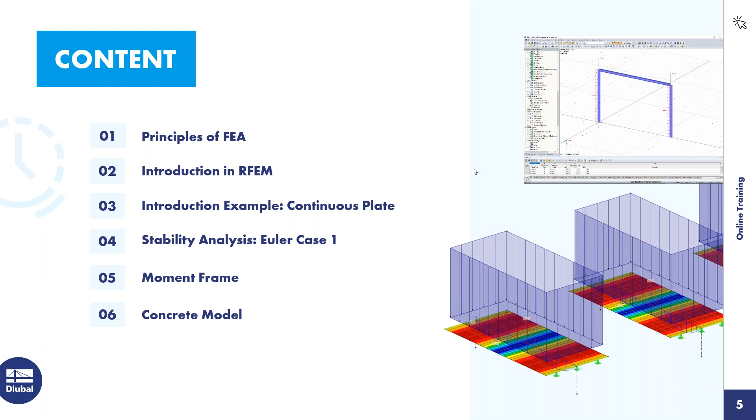So now we can just dive right into the first subject, which is the basics of FEA software.

When using computer software like FEA software, it is mostly and usually based on the displacement method. Another method you may be aware of is the force method, where the unknown is the force and the internal forces need to be calculated or can be calculated. With the displacement method, the unknown is the displacement. So to solve for this, the displacement vectors must be calculated, and then the internal forces and support reactions can be determined.

So the main problem today is an analytical solution can be difficult to determine with large complicated structures. Doing hand calculations for some structures with complicated and odd geometry can almost be impossible or feel like it's impossible. The limits are being reached with large complicated structures, and it's just difficult to get accurate results. And so this is where FEA software comes in.

So structures can now be modeled and converted into a finite interconnected element mesh. Then the material and cross-section properties are determined or given at each FE mesh node, and the mechanical behavior is transferred between these elements. Discretization is a word that I would like you to walk away with, and this is the act of structures being submeshed into finite elements, which is done in FEA software.

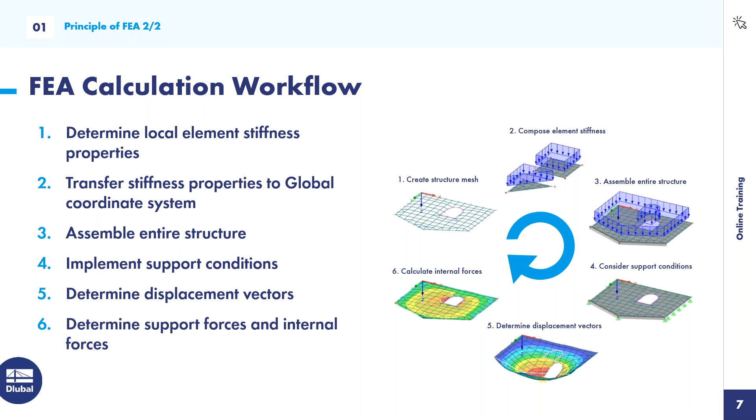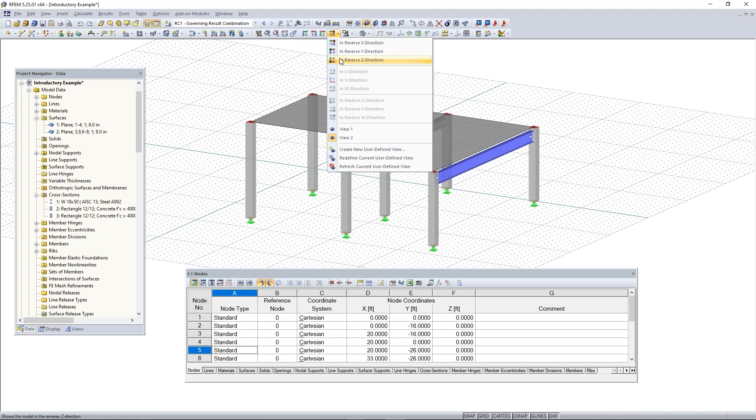We can also change the view of the model. If we go up here, in this category of the toolbar, we have views in the X direction, the Y direction, and the Z direction. We can also change these into the reverse direction. So if we want an elevation view of our model or maybe a top-down view, we can choose these views.

Then in the project navigator, we have at the bottom here in a folder called add-on modules, our add-on modules. RFEM is great for viewing things like internal forces, but if you want to design your structure or elements of your structure, you will need to use add-on modules, and all of the student versions of RFEM come with every single add-on module.

So this is pretty handy and you can play around with these, and they're basically just for design of different materials, and you can see that's how most of them are organized. You can also find the add-on modules up here in the toolbar, and you can see that they're organized again based on design.

Next, we have in the project navigator our display tab down here. The display tab basically allows you to turn aspects on and off within RFEM. For example, we can turn off something like our surfaces, and this just turns off the rendering and display. The surfaces are still there within the analysis, but this just allows you to turn them on and off visually. You can see that this is all organized based on these expandable and collapsible folders. So things like loads and results, we can also turn on and off as well.

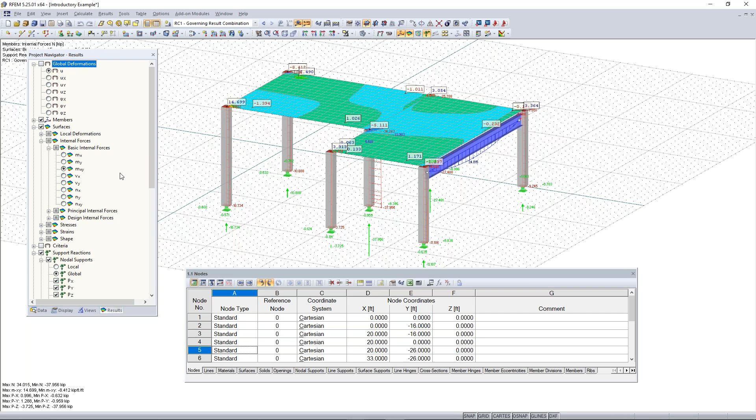Next tab to show, if I turn off my visibilities, is the results tab. This is the last tab in the project navigator. If I turn on my results, you will see that the results tab will pop up here. Again, it's organized similarly to the display and data tab. I'm not going to go into the results in detail right now, but we will later on within our other examples. So I'm going to turn these off.

And then the last thing to go over before we hop into our example is how to navigate through RFEM. We can click in the scroll wheel button if we want to move our model around, and use the scroll wheel to scroll in and out. Then we can hold Control and click in the scroll wheel to rotate the model. If you don't have a scroll wheel, you can go up here to this tool, called Move, Zoom, and Rotate.

You can click on that and then left click to move. You can also hold Shift and zoom in and out with left click, and then you can hold Control and rotate the model. So that's pretty handy. You can also do all of this with the arrow keys on your keyboard, and they perform the same function.

So now we can open our new model to start off modeling our continuous plate example. First, let's go up to the new model button; this is a way to create a new model. You can also do this by going up to File and clicking New. Then we'll go to our model name, and we have to give each model a name. So we'll name this continuous plate example. You can also enter a description for your model. This isn't needed, but it is an option here.

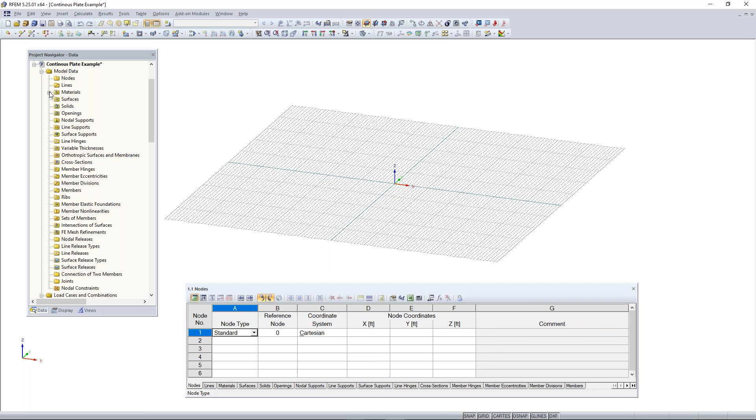So the first thing you'll notice when I open my new model is my work window is blank, and my grid is here in the work window lying in the XY plane. My tables are all blank; some materials have come over from previous models, but we'll delete those. And the first thing we might want to do before we start with our model is take a look at our grid and make sure it's set correctly. So we have our grid points here. They're all spaced by 1 foot, and we have about 50 points in each direction.

And if we want to change the settings of our grid or work plane, we can go up here to this button and click on it. And you can see here we have our work plane settings. So everything up here we don't need to really worry about. This is if you want to change the plane that your work plane sits in. So we'll just keep it as the XY plane and model in the XY plane. Over on the right hand side here, you can see, like I said, we have 50 grid points in each direction, positive and negative. We'll leave this as default, and also the spacing for each grid point we are going to leave as 1 foot. So everything here is okay for this example, so we'll click OK.

And now we can begin with modeling our concrete plate. So to model a 2D surface in RFEM, it's pretty simple. All we need to do is either go to the Insert menu up here and then Model Data, and then we can go to Surfaces, and you can see we have a lot of different surfaces to choose from. We're just going to choose Plane, and then Graphically, and then we can choose a rectangular surface, since our plate today is going to be a rectangular surface. Or instead of going to this menu, we can simply go to our toolbar up here and locate the new rectangular surface toolbar button, which looks like this right here, and we can click on it.

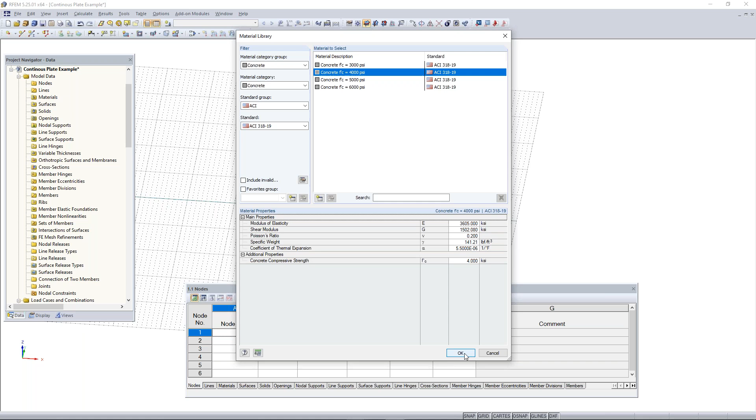So now we have our material chosen, and so now all we need to do is tell the program how thick we want this material to be. By default, for imperial units, 8 inches is selected. We want to increase this to 12 inches for these plates. And so then we can click OK, and now we can draw our plate.

So you'll see my cursor has turned into this reticle-looking cursor, and I also have the coordinates right next to it telling me where I'm located along my XY grid plane here. So I'm going to choose the origin, and then I'm going to draw a 32 by 16 foot plate. So all I need to do is move over horizontally 32 feet, and then I can move up 16 feet in the vertical direction. And then all I need to do is left click. So left click at the origin, and then left click a second time to mark that second point.

Then I can right click, and once I right click, that will cancel out of the tool. You can also hit escape if you like as well to cancel out of a tool. And now you see we have our plate here, or our rectangular concrete surface.

Now the rendering in RFEM you can see is just simply a 2D element with boundary lines defined, but in the calculation the stiffness will be taken as 12 inches thick, so no need to worry about the rendering. This plate or this boundary line is located always at the center of the surface, so there will technically be 6 inches on one side and 6 inches on the other side.

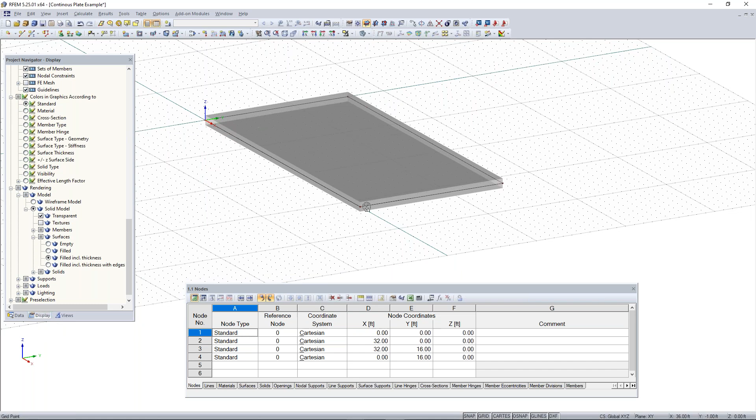And if I go to my display settings and scroll down, we can change the rendering real quick just to show you what I am talking about. So if I go to here under rendering and I change this to filled, the definition of the surface is always at the center of the surface. So if this is 12 inches thick, there's 6 inches of thickness on one side and 6 inches of thickness on the other side. So I'll just turn this back to default, and then we can move on with modeling the other plates.

So I can model the other plates by just going back to that tool and clicking OK. And then I'm just going to model the second plate right above the first one, and it's going to be 5 feet away from the first plate. So I'm just going to draw this one, and again it's going to be the same dimensions, 32 feet by 16 feet. And then I can right click to exit out of that.

And then let's say I already have this surface here and I need to just duplicate it. I can simply just select this second plate here by highlighting it from right to left or from left to right. And then I can use the tool up here called Move and/or Copy.

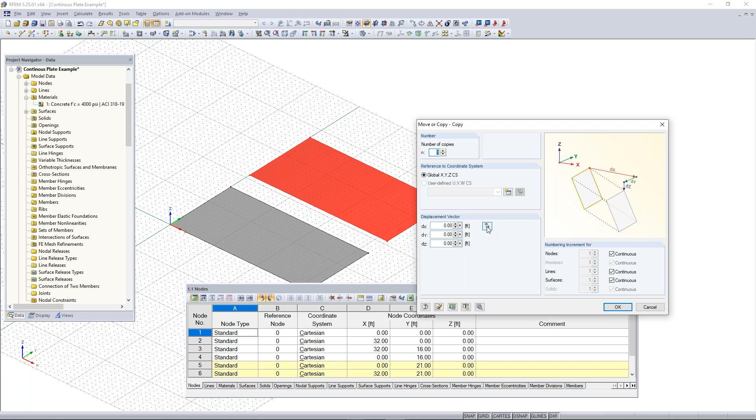And what this tool allows me to do is make one copy of the element that I selected, and then I just need to tell it which way I need to displace it within the plane here. So I can either enter those displacement vectors, or I can use this graphics tool here. So I can click on this button, and then I can simply just move this plate.

I'll choose my bottom point here, and then I want this bottom point to move again 5 feet above where this plate's located. So that'll be this next point. I'll hit OK. And now I've made one copy of this plate and moved it that much more in the Y direction. So now we have all three of our plates here,

and since my grid is only 50 grid points or 50 feet by 50 feet, I'm just going to highlight all of my plates here, and then I'm going to left click, and then I can move my plates down into more of the center of my grid here.

Next thing we want to do is model our beam. So what I'm going to do is create a new cross-section or create a new member. And to create a new member, we can either go through the insert menu or we can choose the button here, new single member. So I'm going to click on new single member. And then under new single member, I'm going to go to the cross-section library.

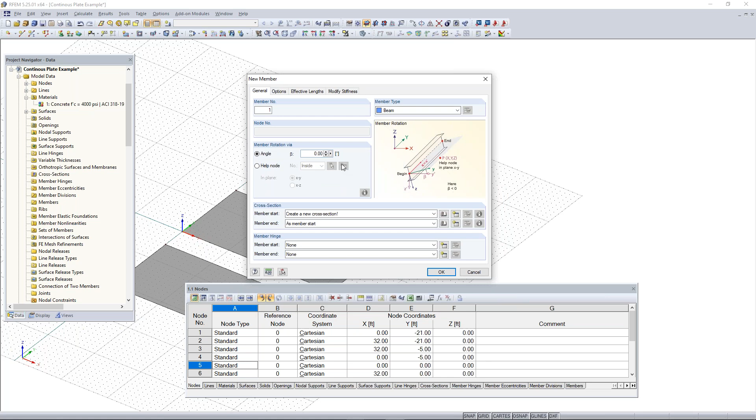This is the new single member dialog box, kind of similar to the surfaces dialog box where we can choose our member type. For beams and columns, we want the member type beam. And then for our cross-section, we can choose the cross-section start. So we can either create a new cross-section or go to the cross-section library to choose from a predetermined cross-section shape. So I'm going to click on the cross-section library.

And once that pops up, you can see our cross-section library is organized by rolled and built up sections based on a standard. Then we have our parametric thin walled sections where they're parametric, so you can choose the dimensions manually for each of these. We have parametric massive, which are usually used for concrete, and then parametric timber, which you can again use for timber and choose the dimensions for.

Since we're using concrete for these plates here, and they're rectangular in shape, we're going to use the rectangular cross section. And then you'll see the rectangular cross section parametric window will pop up, and then we can change our parameters. So we can make the base 40 inches, and then the height we can make 12 inches.

And then now that we have our dimensions in, we can choose our material, just like the surface. So since we already defined this concrete 4000 PSI material, we can just simply use that instead of having to go into our material library again. So we can click OK, and then we can click OK out of that box.

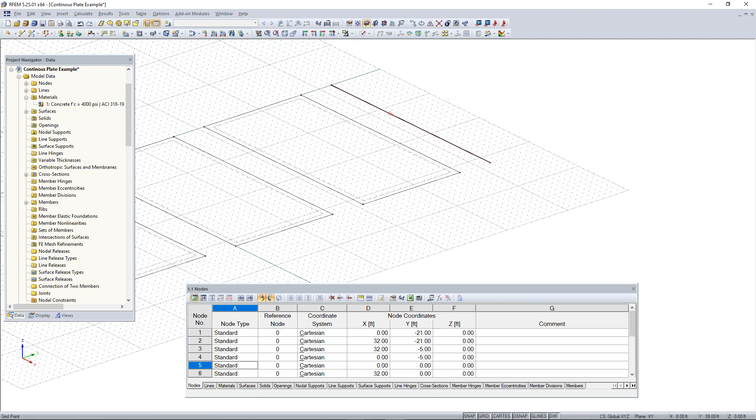Then you can also see that our surfaces are also just made out of these 4 boundary lines, and this dotted line is showing you that there is a surface that is made up here. So again, we can use this button up here to change the rendering of our model, and then we can move on with dividing up our lines here and adding some supports to our model.

So what we can do is divide the lines here. And to divide lines in RFEM, there's 3 different options. So what I can do is right click on this line, and then I can go up to divide line, and you can see the 3 different options for dividing a line.

I can either do it graphically. So if I choose graphically, I can simply just go to the line, and then I can see from the start to the end, the length at each point, and my cursor will snap to it. So I'm going to add this node and divide the line halfway down it at 16 feet.

And then you can see I can do the same thing for this line up here. That's just a simple way of dividing lines graphically.

The next way we can do this is by right-clicking on this line, and we can divide our line by intermediate nodes. When I choose this option, these arrows will pop up on each of our lines here, telling us the orientation that we drew the line. So this kind of helps us if we need to know that.

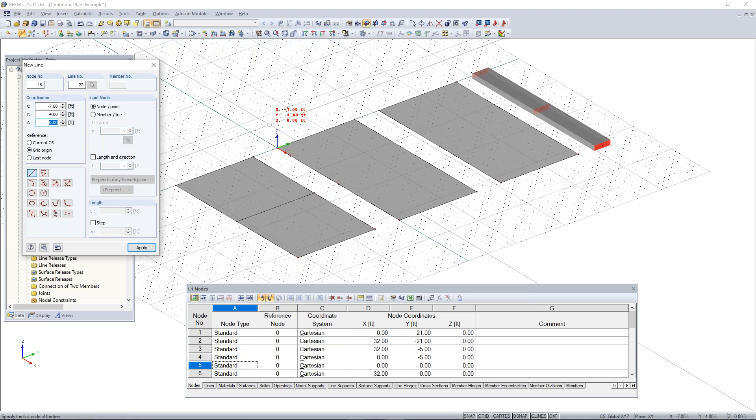And then I can draw my line, and you can see my cursor snaps to these nodes here. I'm going to snap to this node and then to this last node. And then I can exit out of that tool, and instead of drawing the rest of these, I can use this pretty powerful function we have.

Where I can click and select a line here. And whenever you click and select something, you can hold Control and then right click and drag, and that allows you to make a copy and drag that element to wherever you want. So I'll left click, hold Control, and then I can drag this line again to the last plate there.

And now we can add in our line supports. So within RFEM, there's two different supports. We have nodal supports for just single points, or line supports to support the whole entire length of a line.

So I'm going to go up here to the button New Line Support, and then I'm going to add in hinge supports. I can choose from two different presets we have for line supports. The hinge support is fully fixed in translation, but fully released in all of rotation. The rigid support is fully fixed in all 6 degrees of freedom. You can see how that is checked, how all the degrees of freedom are checked off, showing you how the condition is defined. So I'm going to use the hinge supports and click OK.

And then I can choose and click on each of my lines here, and I can simply do that for the rest of my lines to add in my supports to these plates.

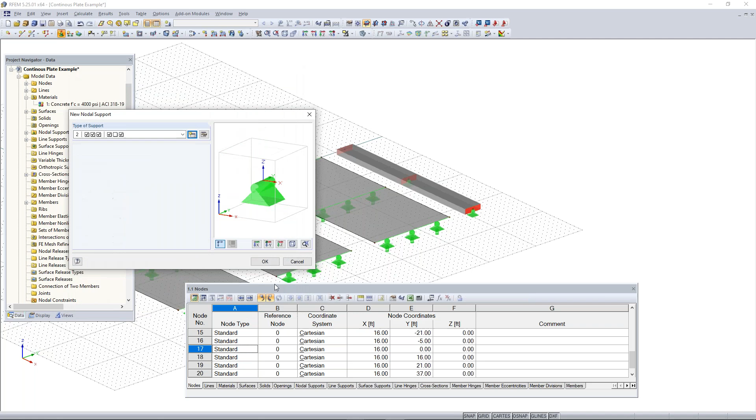The reason for this is because if all 3 supports on this beam were simply hinge supports, then this beam would be able to rotate infinitely about its x-axis, causing an instability within the program. So we need one of these supports to lock the rotation about the local x-axis.

If I right click on this beam, I can show the local x-axis system by right clicking and going to the shortcut menu, then to the local axis system. Now you can see the x-axis as well. I'll right click and turn that off.

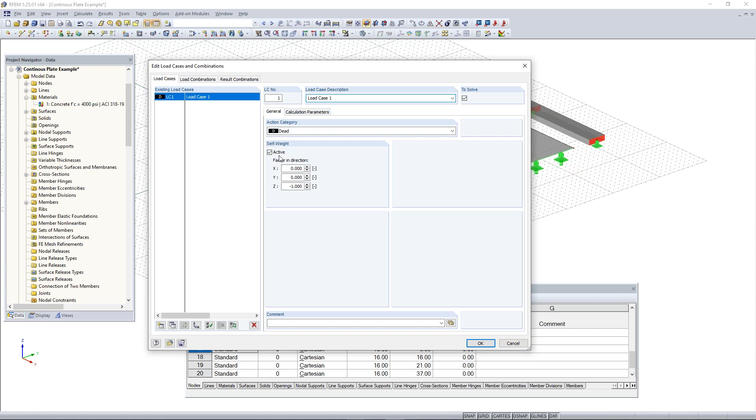We need to enter in a description, so we'll name this load case 1, since we're not designing according to any standard and the action category isn't too important right now. You can see self weight is automatically turned on for dead load. For this example we don't want self weight activated, so I'll uncheck that option. You can see the -1 in the z direction for the factor and direction is applied, which basically multiplies this factor by the self weight of the model in the downward direction to simulate gravity. We'll turn this off for now and click OK.

Now what we want to do is create surface loads for our plates here, so I'm going to go up to new surface load.

This button here, new surface load—to go over this, you can see we have a bunch of different loading options within the toolbar: nodal loads, member and line loads, surface loads, and solid loads. Mostly we're just worried about member loads and surface loads. You can also find this loading information up here in the insert menu if you have trouble finding the correct loading type on the toolbar. So again, we'll click on the button, new surface load.

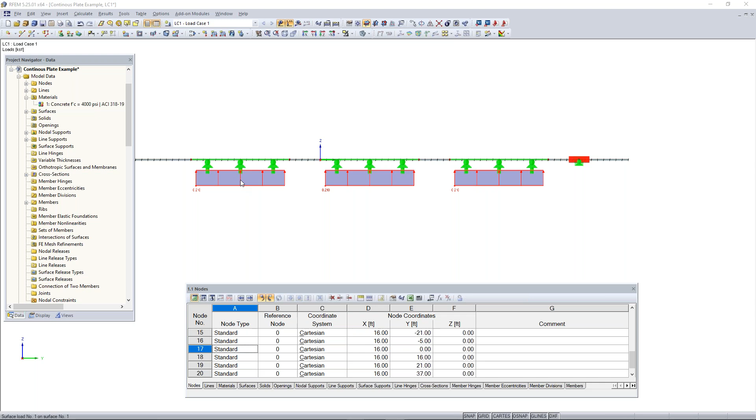I can drag from right to left to select my loads, select all of them, double click them. Then all I need to do to change the direction or flip the direction is add in a negative sign. I can click OK, and then rotate my model back. You can see my loading has been added.

I can also turn off this grid in the background now that we're done with modeling, to get a cleaner look. So I can go down here, and these options down here are buttons used to turn off certain functions like snap, grid.

You can also change your grid to a polar grid. We'll keep it as Cartesian. You can turn off some other things like guidelines as well. So we'll just turn off the grid, and now you can see we have just a cleaner look, better for presenting.

The next thing we need to do is add our loading to our member. For our member loads, we want to use member loads, always keep that in mind. Then for lines, you want to use line loads. That's how you know the difference between these two.

Since we're applying a load to the member, we want to use member load. This member loading is going to be the same as the uniform load or the surface load that's applied here, just converted into a linear load. So we'll keep the load type as force, and it's going to be uniform.

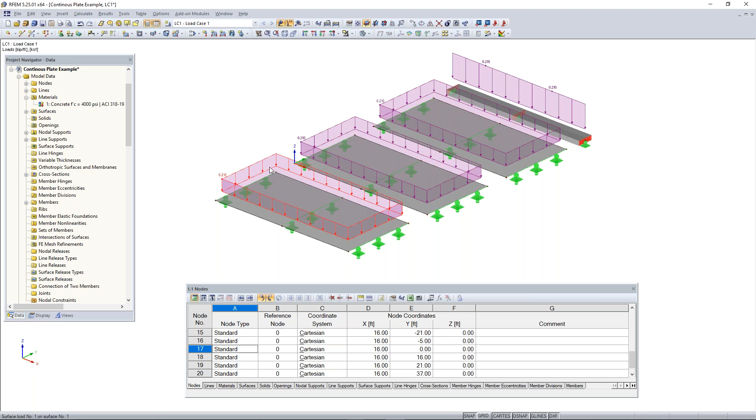Then we can now add in or edit our FE mesh. FE mesh for members is not too important, but FE mesh for surface elements within RFEM is pretty important. This is what you need to look out for, and what we can do is go up here to calculate.

We can just see what the global FE mesh looks like when we hit generate FE mesh. You don't have to do this before any calculation, but for example purposes, I just wanted to show you what the FE mesh looks like. It's easier to view if I turn this into a wireframe view since it's gray on gray. You can see this is what each FE mesh element looks like on our surfaces here.

If I go to calculate and I go to FE mesh settings, by default, the FE mesh in imperial units, the target finite element length for each of these mesh elements is 1 foot. This actually looks pretty good on our surfaces here, but for example purposes, if we need to refine our FE mesh for certain elements, you can do this.

So what I'm going to do is add in an FE mesh refinement to each of these surfaces with different lengths. I'm going to turn off the global FE mesh for now, then right click on the first surface here, turn this back into a solid transparent view, right click on the first surface and go to FE mesh refinement, go to new.

And once I do this, it's asking me to create a new FE mesh refinement definition. So I'm going to go to the button, create new FE mesh refinement. I'm going to go to surface, and then I'm just going to make the target FE length of this refinement to be 0.2 feet. So global FE mesh in RFEM was 1 foot. If I need to make a refinement and shrink the FE mesh for better accuracy on a smaller surface, I could do that and shrink the FE mesh length to 0.2 feet.

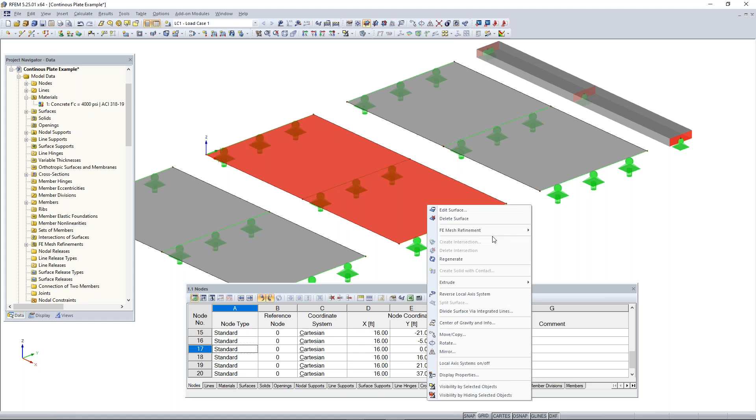And we're just going to do that for this first surface. And then we're going to do the same thing for these other two and increase the FE mesh length to see what that looks like. So we'll right click on the second surface, go to new FE mesh refinement, create a new FE mesh refinement. And instead of 0.2 feet, we're going to make this one 0.4. And then the last one, we'll do the same process.

And you can see those other refinements that I created, we could choose as a preset if we didn't want to have to create a new one. But for this one, for this surface, we want to increase the length to something like 0.6. And we'll click OK, click OK again. And then if I go up here to the calculate menu and I go to generate FE mesh, and then I turn this into a wireframe view

and display the FE mesh, you can see that this little symbol is on our surface telling us that we have an FE mesh refinement on the surface, and you can see that those symbols are the same shape, telling you easily what the FE mesh length of the refinement is. And you can see the difference in FE mesh length between these from 0.2 feet to 0.4 feet to 0.6 feet. And that's kind of giving an example of how FE mesh lengths can change over these different plates here.

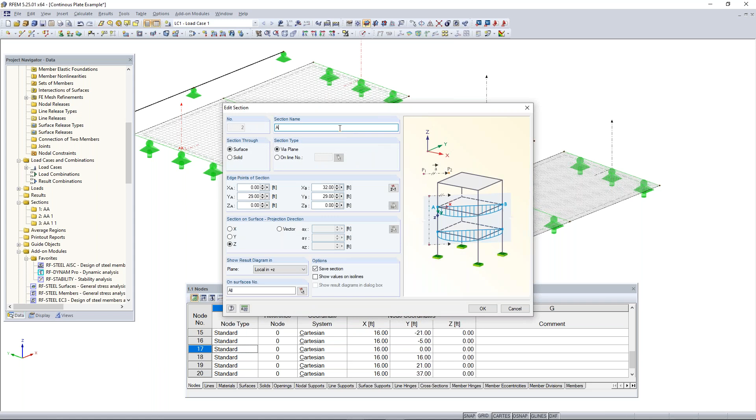So I can go into my project navigator, and then I can go to my sections folder here and expand that. And you can see the names here. So I can double click on one of them, and I can change this name from AA to AB. And then I can change this third one from this to AC and click OK.

And then I now have my section cuts, and I'm going to turn this back into a solid transparent view. And now basically everything is ready for calculation. So I'll run the calculation, and then I think this is a good point to take a 5-minute break.

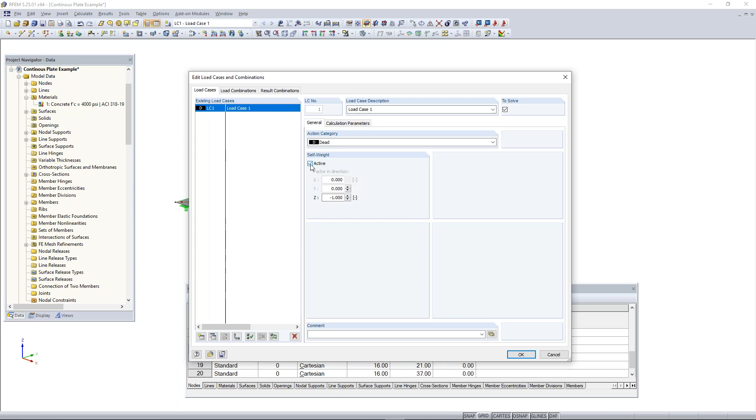So if I click OK, the self-weight is now activated. And if you wanted to see a graphical representation of the self-weight, you can go to the Display tab in the Navigator, then go to the Loads section, turn on my loads, and also turn on my self-weight loading. That's normally hidden, but if you wanted to view what the self-weight loading looks like, you can see that there as well.

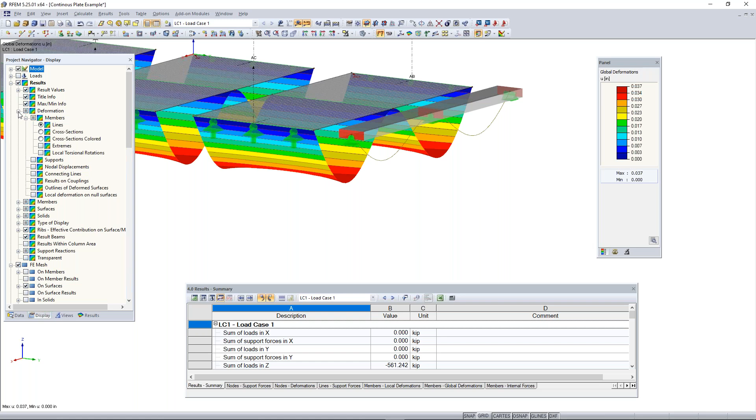But if I want to have this color coded as well, or colored cross section, I can go to display, and then I can go into the results here, and then under results, we want to expand deformations and then expand members, and I can turn on colored cross sections.

So then you can see the rendered colored cross section deflection shape of our member is shown as well, just giving a better visual of what that looks like, and you can see it's basically almost the same as the deflection for our plates, and we're going to go over comparing these results in just a little bit.

Then the next thing we can view if we turn off our deformations is the results on our single member here. So if I check on members and then under internal forces, I can check off the option to view our axial forces. We can also view our shear forces. So VZ is for shear in the local Z axis.

So again, if I right click and turn on the local axis system here, you can see the local axis here, so we have our Z direction. So this is the shear in the local Z direction. If I turn this into wireframe view, we can get a nice look at what that shear diagram looks like as well. So that's good.

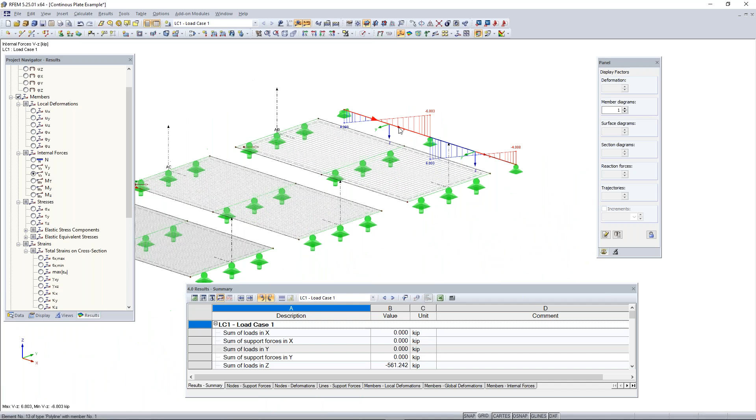Next thing we can also view is our moments about the local y-axis. So we can take a look at what that moment diagram looks like as well. Looks like we get a max moment here of negative 21 kip feet. So next we can also view the surface results. So for example, we can take a look at our internal forces of our surface. We can take a look at the moments or mx along the local x-axis.

So I can show the local x-axis of my surface here if I would like to by right-clicking on it and then turning on the local axis system for all surfaces. So now you can see what that axis system looks like. It's similar to the member axis system. So these are the moments along that x-axis, and you can see again that it is color-coded.

And this panel on the right-hand side will give you your max and minimum results and that color coding as well. You can also take a look at shear on our surfaces here. So this is shear along the x. And then we can take a look at our NX or our N forces or axial forces on our surface. So we can take a look at what those look like as well. We don't have any right now because there are no forces in that direction.

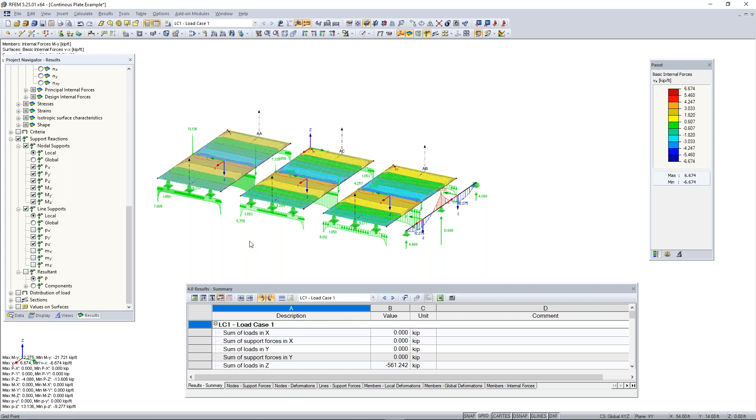So we can take a look at all of those moment reactions. And then the next thing we can take a look at is values on surface. So we can turn on or turn off our support reactions now to get a better view of the values, and we can show basically the extreme values on our surface to take a look at those forces in the surface as well.

So now that we've gone over the results, we can take a better look at the results and activate the section cuts here. So now that we added the section cuts along our surface, we can turn those on. And now we can basically see what the shear of the surfaces are with a shear diagram and that section cut plane. So right now, you can maybe get a better look at how those results differ in accuracy between these different plates here.

So that all depends on the FE mesh size, and you can see the accuracy increases the smaller your FE mesh gets. So right now we're looking at a max shear force in the center of our plate here of negative 3.397. And this was for the surface with the smaller FE mesh. And then you can see how that changes by just a little bit. So negative 3.397 and then negative 3.398. And you can just see how that changes depending on the size of your FE mesh.

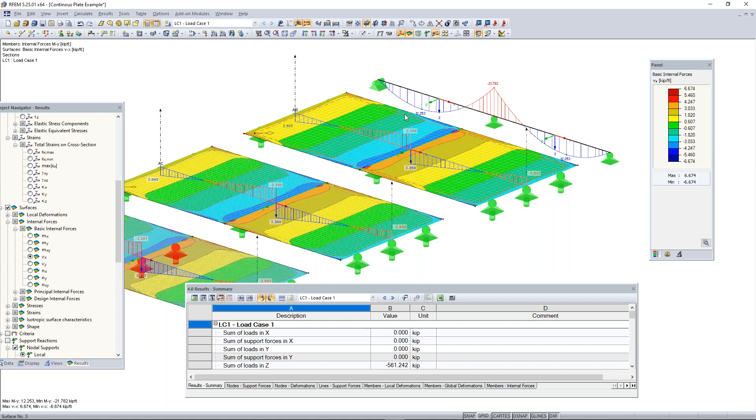So this mostly needs to be turned off because the methods used in school assume an infinite shear stiffness when in reality there are some shear deformations happening when the member bends here. So you need to keep this in mind when comparing hand calculations of deformations in RFEM. And so right now I just want to go back to the PowerPoint so we can go over and compare some plate theories. So if I hop back to the PowerPoint, then we can go over plate theory. So to help understand these plate theories, I will use beam element theories as an analogy.

So if I go to the analogy for the beam elements, the first beam element theory is Bernoulli's, and then the second beam element theory is the Timoshenko theory. So these are the basic assumptions for Bernoulli's theory. So the first assumption is that the cross-section is remaining in plane and perpendicular to the member axes. And then the second assumption is that there is no consideration of shear deformations and the shear stiffness is completely rigid.

Next, the assumptions for the Timoshenko theory are almost the same. The first assumption is the same with the cross sections remaining in plane and perpendicular to the member axes. But the second assumption differs where shear deformations are taken into consideration and shear stiffness is limited and is not completely rigid. So this is basically what we turned off in the calculation parameters, the shear stiffness. So when we turn that on, we're basically assuming that the shear stiffness is limited and is not completely or infinitely rigid.

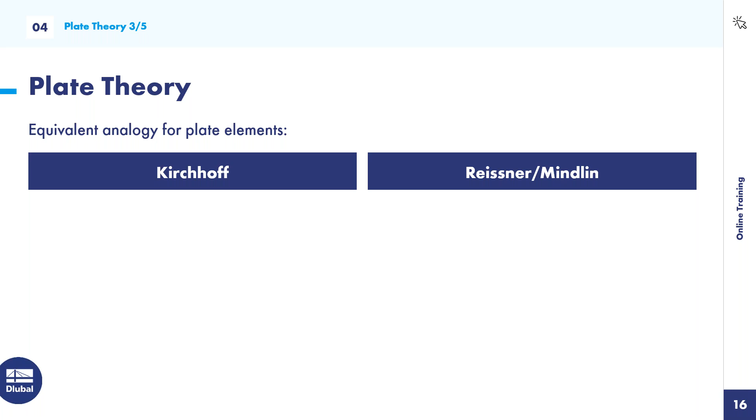So a similar theory to Bernoulli's, but for plates, is the Kirchhoff theory. And then a similar theory to the Timoshenko theory is the Reissner-Mindlin theory, which works for plates as well. So here are the assumptions.

So for the Kirchhoff theory, we have to assume that we're using a geometrically linear analysis and small deformations. Then for the material, we're using Hooke's law. It's a linear elastic material. Cross sections, we're assuming, remain flat and there's no warping. We're assuming it's a constant thickness. And then most important, we're assuming that there is no consideration of shear deformations.

Then for the Reissner-Mindlin theory, we're assuming basically the same aspects as the Kirchhoff theory, but most importantly, we're taking into consideration shear deformations, and we're also taking into consideration transverse and lateral strains. These two assumptions are the same as Timoshenko's. For Bernoulli's, we weren't taking into consideration shear deformations, whereas for the Reissner-Mindlin theory, we are. Now, for transverse and lateral strains, you may be wondering what that looks like. So in this next slide, we can have a better look.

So here we have one beam, and when tension force is applied to it on either side along its length, the cross-section will shrink with regards to the height and width of the beam. You can see on the right-hand side that the height and width are going to shrink based on the strain, and this mu factor here is what takes this into consideration. So this is what I mean when I say we're taking transverse and lateral strain into consideration for the Reissner-Mindlin theory.

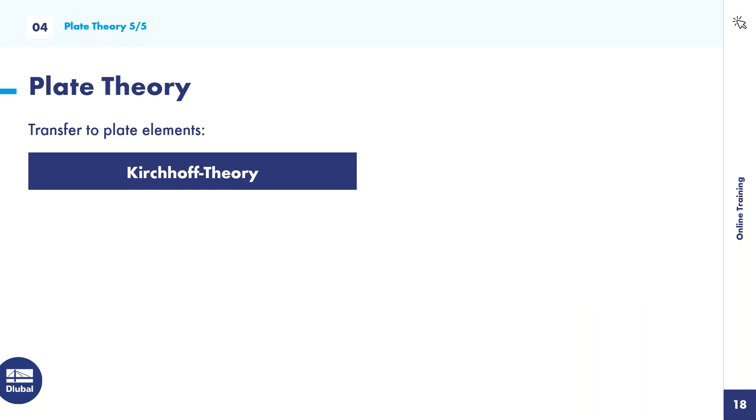And just to summarize these two theories again, the Kirchhoff theory and the Reissner-Mindlin theory. With the Kirchhoff theory, again, we don't take shear deformations into consideration. So basically this theory yields great results when used for very thin plates, for example concrete slabs, and for pure bending load bearing capacity. So this is just a simplified approach.

And then for the Reissner-Mindlin theory, again, shear deformations are taken into consideration. So this theory gives great results for thick and thin plates. The shear influence component is relatively high, and there's significant error when neglecting shear forces. So if we have a very thick plate and we neglect the shear deformations, such as in the Kirchhoff theory, we're going to have some error compared to realistic results. So this gives you more realistic results, a higher value approach, and more accurate shear forces.

So just keep in mind that the Kirchhoff theory only considers pure bending bearing capacity and is a simplified approach. And the Reissner-Mindlin theory really just works great for thick and thin plates and is an all-around better analysis. So in my opinion, you should use the Reissner-Mindlin theory, and it's just good to know the difference between these two as well.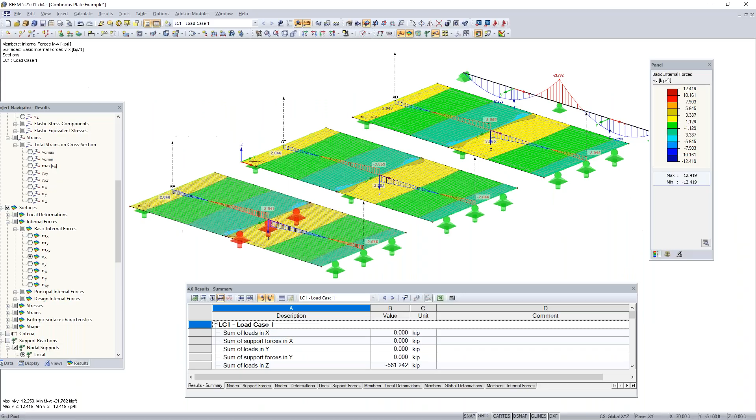So what we can do now is hop back to RFEM and begin modeling that example. First thing to do is go to the new model button. We can name this model the Euler Case 1 example. We don't need to give it a description, and we enter the type of model as 3D. We don't need to model it according to a standard, although I will this time just to show an example of how that works. I'll choose ASCE 7-16 and choose the option to create combinations automatically, then leave everything else as default and click OK.

Everything will reset, the grid will reset, we'll have a blank grid and blank tables, and we can start modeling this example. The first thing we need to do is create a new member, so I'll go up here to new single member.

Under new member, this is going to be a W shape, so we need to tell the program what cross-section to make it. We'll go to import from cross-section library, and then once that comes up, we're going to choose a W shape from a standard, so we're not going to enter the dimensions ourselves. We'll go to our rolled I-sections here and click on the W shape or I-section, then go to the filter on the left hand side.

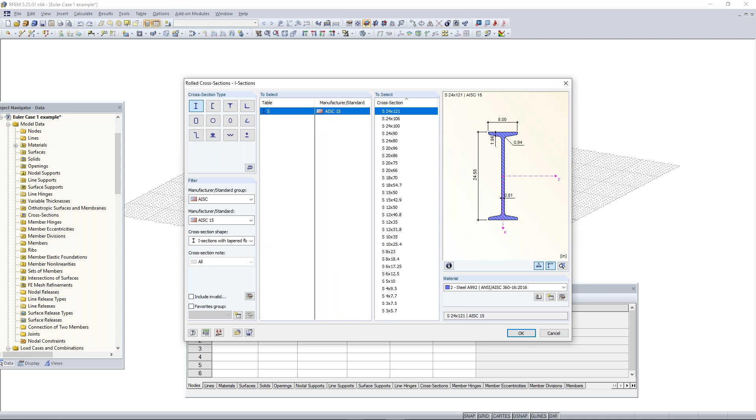I want I-sections, actually I want wide sections, so I'll go to my W sections here, and for this cross-section I'll just choose a 12 by 35. I'll scroll all the way down. The material for this I-section will be steel A992. Again, you can choose the material for your members by either entering or creating a new material, or go to our material library. You can also create a new material if you know the material properties to enter. Now we can click OK.

Once we have our cross-section and material entered, we can click OK again. And this member is going to be a column member.

I basically want to draw this column out of plane, and there are a couple ways to do that. I can either change where my grid lies in my work plane by going up to the XY plane, and choose to change this to the X or the YZ plane, or the XZ plane as well.

To draw my column vertically, I'm just going to select the origin, left click, and then draw it 30 feet up. And now my column's drawn.

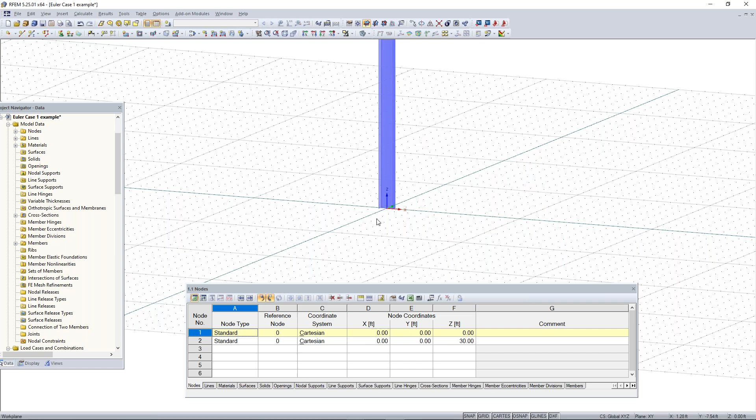Something to go over real quick is highlighting things within RFEM. You can drag from right to left or from left to right, and this will only select objects that are fully engulfed within this box here. So you can see I'm only selecting my node.

Maybe it'll be a little easier to see up here. If I drag from left to right, only my node is being selected. But if I drag from right to left, then anything touching this box will be selected. So now you can see that both my node and my column are selected when dragging from right to left.

This is helpful because if we go to new nodal support, instead of hinged, we're going to choose the nodal support fixed or rigid. Now all 6 degrees of freedom are selected. I'm going to click OK.

Then what I can do is just drag from left to right, and now you can see that only selected my node, and it also added my rigid support to the node there. So I can make this a little bit bigger to see, or actually I can't right now, but now you can see we have our column fully supported at the bottom.

And so now we just need to create our loading. I'm going to go up to my new load case button here to create my new load case. I'll click on that, and then the edit load cases and combinations dialog box should come up.

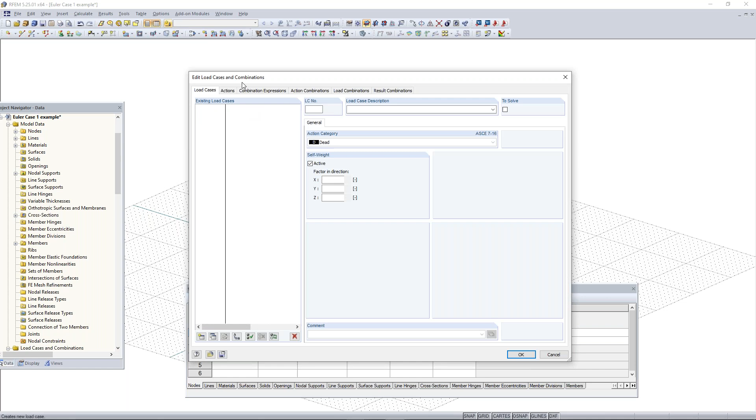You can see again, our dead load case is automatically created. So I'm just going to name this one test, and we also want to turn off self-weight again for this example.

I'm going to click OK, but I did also want to show you that our load combinations are then generated automatically. We only have one load case, so we're only going to have one combination for LRFD and ASD, but you can see how that works when you have other load cases with different actions. We also have our result combinations that take all of the load combinations, create an envelope solution, and show you the max and min results. So that's just a quick overview of how creating those automatically works.

We only need one load case for this example, so we can leave all this the same and click OK. The next thing we want to do is add a load to the top of this column here. Again, for this one, we're only adding a point load to this node right here. So I want to go to the load tool, new nodal load.

Once I click on that, the dialog box will pop up to use this tool. It's pretty simple: you can just add in your forces in either the X, Y, or Z direction, or you can add in your moments about the X, Y, or Z axes.

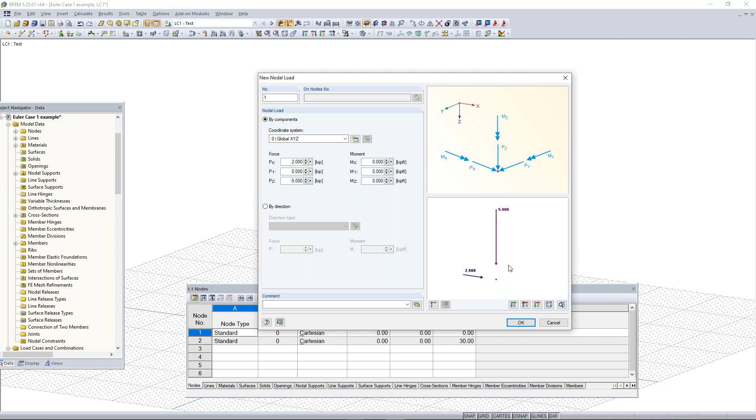So I'll click OK, and then I can either select the node and left click on it, or I can highlight it and add in the loading like that as well. I'll right click, and now you can see if I rotate, we have our column here with our lateral loads and gravity load here at that single node at the top.

Now I do need to show you something pretty important. If I click on calculate all, this is actually going to run through our load case, load combinations, and result combination. I'm getting an error for very high deformations, but what we can see here is our global deformations. If I look at this in the elevated view, turning off my tables and grid, you can see that we're getting a max deflection in the x direction of 3.782 inches.

I can also display this as a color cross-section to get a better look at this. So this is what the deflection of our column looks like with the applied loading. Again, maximum deflection is 3.782 inches.

We can also take a look at our member internal forces. If I check on members, and take a look at the MY results, the moments about the Y axes, you can see at the bottom here, at the support, we're getting a max moment of negative 60 kip feet. Try to keep those results in mind.

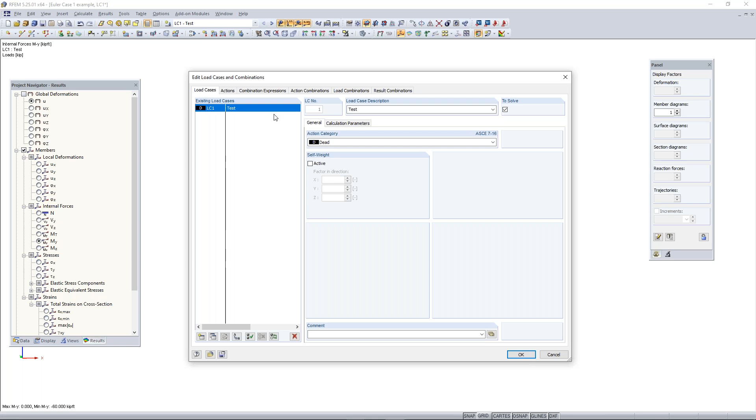So now I'll go back to the load combination and load case window. If I go up here to edit load cases and combinations, and then we go under our load cases tab. Under our test load case here, we can look at the tab called calculation parameters. Everything else, we mostly just want to look at the method of analysis here.

By default, load cases in RFEM are calculated based on a first order analysis, and then load combinations are calculated based on a second order analysis. So if we look at this right here, this load case is being calculated by a geometrically linear analysis, and we can change this first order linear analysis to a second order analysis.

You may recognize this analysis more as taking into account little p delta and big P delta. That's what a second order analysis considers. Basically, this linear analysis sets the equilibrium of the beam based on the undeformed system, whereas a second order analysis sets the equilibrium based on the deformed system.

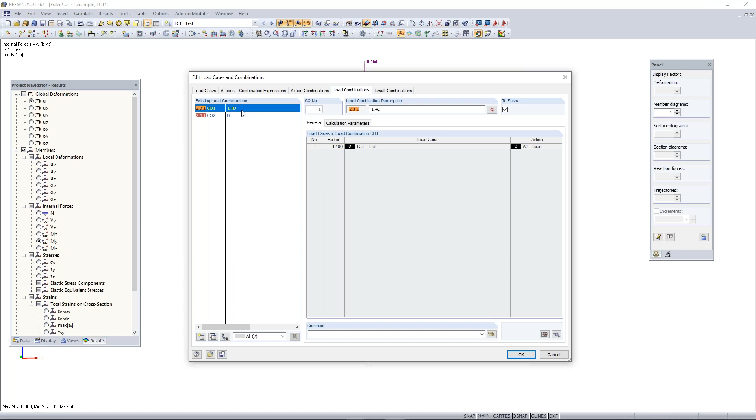So keep this in mind, that you will get two different results when switching between first and second order analysis. Load cases are always ran by default as a first order analysis, and if we take a look at load combinations and go under the calculation parameters for these, these are always ran as a second order analysis by default as well. Just keep that in mind when checking between first and second order analysis.

Another thing to note is that members within RFEM are determined to be a beam or column based on how the loads are applied. So in this case, we have a column here because of the axial forces applied to the top. RFEM decides if this is a column or beam based on the axial forces applied to the member.

Next thing we want to do, for this example, is to change the loads to only 100 pounds in the axial direction. So what I can do is drag from left to right and then change the loads by double clicking on them.

And what I want to do is just change this from -5 kips to -0.1 kips or -100 pounds. And then I want to change the x direction or the lateral forces to 0. So we'll click OK.

And then what I want to do is open the RF stability add-on module. So let's say now we want to run a stability analysis on this structure here. So what I want to do is open the RF stability add-on module. And again, in the project navigator, you can scroll down and find the list of add-on modules.

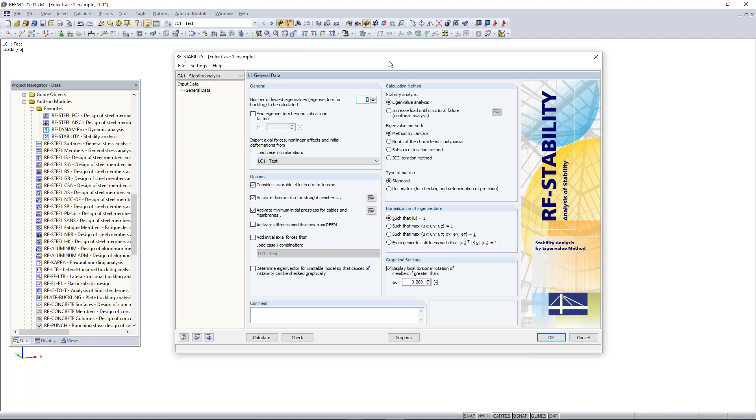So once the add-on module pops up, this is what it looks like. It's basically just a dialog box within RFEM, and all of the information from your structure in the background is taken into account within this dialog box here. And what RF stability does is it uses the help of eigenvalues and different eigenforms to perform a stability analysis.

So quick background, Euler was a mathematician who came up with different cases to show the critical load factors as well as critical loads and lengths. And this is something that just every stability analysis does. And so the first thing we want to do within this add-on module is we want to make sure that the division of straight members is activated. So that's always activated by default here.

And what we want to do is go into the edit FE mesh settings for members here. And then under the minimum number of member divisions, this is only set to 2. For your members, you want to increase this to 10. This is important and it just increases the accuracy for the division of your members, which is mostly how the program meshes everything in the background.

So we'll click OK. And then the next thing we can do is up here, we just want to make sure that we're choosing the right load case. So we're going to run the stability according to load case 1 here. You can also run your stability analysis according to a combination as well. So everything else we can keep the same as default. Calculation methods we don't need to worry about right now. And so we can go over here to calculate. And once we click that, the calculation should run pretty quickly.

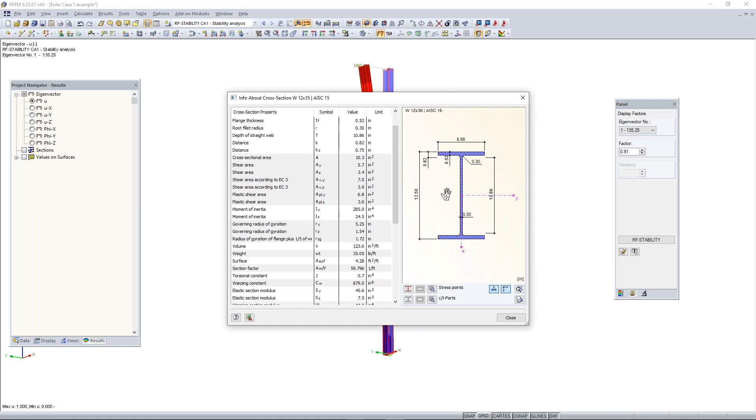So now we can go back and swap back to RF-STABILITY. We can either go to our Data tab here and double click on RF-STABILITY, or we can go to the panel and click on the button here, RF-STABILITY. And then under our RF-STABILITY add-on module, again, we can take a look at our effective lengths factor, and the next thing we can do is show what it looks like when the structure is unstable because the loading is too high.

So what we need to do is change the loading at the top of our column here to something higher that would cause it to be unstable. Right now we only have 100 pounds at the top of this 30-foot long column, so that's why our critical load factor was so high. But let's say we change the loading, just for example purposes, to something like negative 14 kips. We can then click OK.

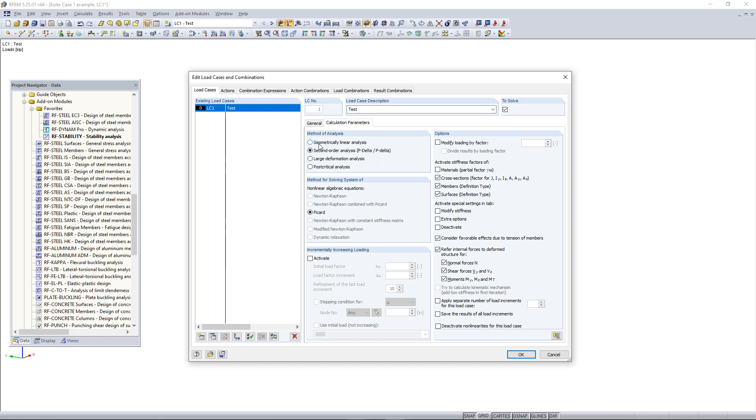And if we're getting an unstable structure, so if we run this calculation, let's say you get this error message saying your stiffness matrix is singular and the model is unstable. It's possible to calculate the critical load factors and buckling in the add-on module RF-STABILITY. If you get something like this and you're sure that your model is all connected and set up properly, the first thing you'd want to do is go to your load case 1 or your dead load case. Right now we have P-delta turned on, so we're taking into account second order effects. To run a stability analysis, we need to make sure this is set to a linear analysis.

So I'll click OK, and then I want to go back to RF-STABILITY. Under RF-STABILITY, we'll again set our load case to our first load case here. Make sure it doesn't have any second order effects to it, because if it does, we'll get an error within RF-STABILITY. So we'll run the calculation.

And now you'll see that our first critical load factor in our first eigenmode is lower than 1, which again, is not good. This means our structure can only take about 96.6% of the loading that we applied to it. It means it's unstable. So this is how you can check if your structure cannot take the loading you applied to it and if it's unstable or not. And again, you want to make sure that all these critical load factors are above 1. So we'll click OK, and again, if we go to Graphics, we can take a look at what those eigenvectors look like.

So now I'd like to go back to the PowerPoint, and I have another question to ask. This is a true or false statement: the critical load factor specifies which factor can be used to increase the stiffness until the structural system fails. Is this true or false? I'll give you about a minute to answer within the question section, and then I'll look and see what the majority of the answers are. We can go over them.

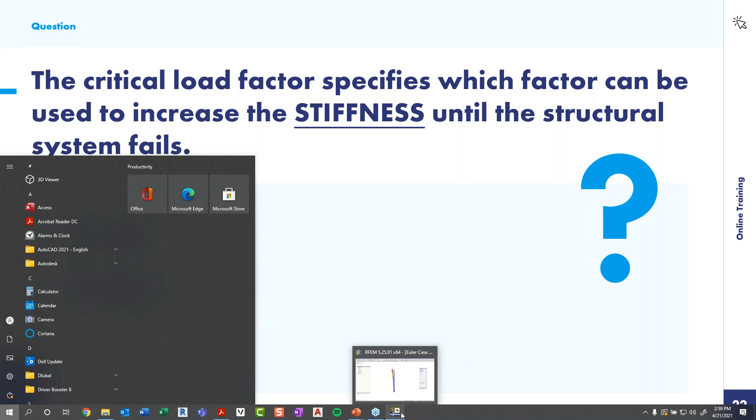So if we hop back to RFEM and look at our stability for this example where we increased the loading, this critical load factor is below 1, meaning that the loading on our structure, the negative 14 kips, is too high. So, good. Then we can turn these results off, and we can show the loading again for our load case 1.

Right now we have negative 14 kips applied for our gravity load. So if we change this to something smaller, like negative 5 kips, and then just to reinforce, if we run these results and we go to our stability and calculate, we should see again a critical load factor above 1 for a more stable model, so 2.

So now we can move on to creating a moment frame out of this column here. So if I turn off the results and I go down here and turn my grid back on, we can right click and turn off the local axis system. And then what I can do is take this whole column here and I can highlight it and hold Control and make a copy of it 10 feet away. So now we have two columns here that will act as our moment frame.

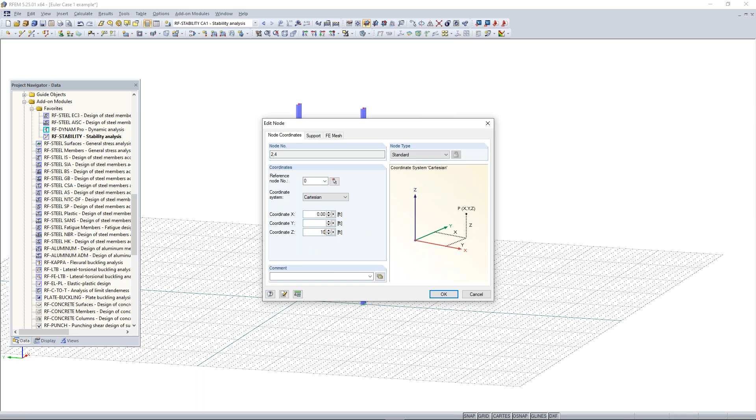Another thing we can do is to shrink the height of these two columns at the same time by highlighting only the nodes at the top of them and double clicking on them. And then we can shrink this down to 10 feet. And now we have two columns here, both 10 feet high. And we can simply just draw the beam at the top here to connect them. So we'll go to our new member. And then we can create a new member to act as our beam.

And this will open our cross-section library. So we'll go to I-sections again. And then under I-sections, we can go to W. And then we can scroll down to something like an 8 by 15. And we can click OK, choose the same material, click OK again. And then we can simply just connect both of these columns here for our beam.

And the next thing we want to do, now we have our moment frame, is add some loading to the top. So we have our loads on our columns here, but we want to add some loading to the top of our beam. So to add in the member load here, we can click on new member load. And then we can choose a force uniform, and load direction, we'll choose the global Z direction. And then our magnitude down here will be something like -3 kip per foot. So we'll click OK. And then we can add in our load here and choose our beam. So now we have -3 kip per foot applied to the top of our beam.

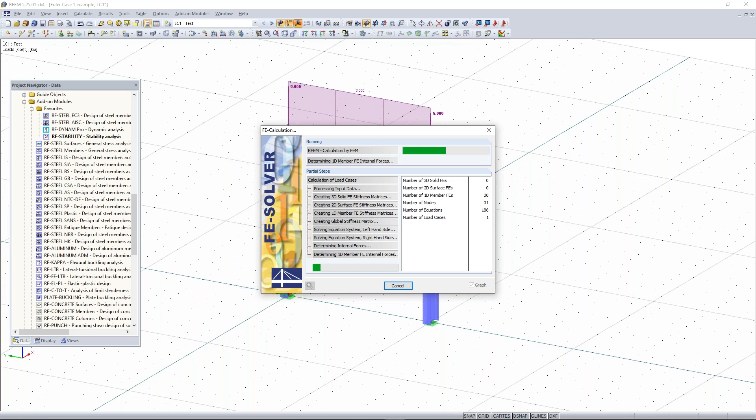So now if we run our calculation for this, and we actually hit calculate all, it will calculate all of our load cases and even the results for our stability, which makes it easier because now if I go to my drop down here, again, I can see my load cases, load combinations, and result combination. I can go to our stability.

And then in the panel here, if I go under the tab here, factors, I can take a look at the eigenvectors here or the eigenmodes. So I can cycle through them and we can see our critical load factor here is 20, so that's good. Then we can see each of our eigenmodes here for this simple moment frame. We can also see that our third eigenmode is warping or deforming out of plane here. So let's say we wanted to make sure that normally our moment frame would stay in plane or have some type of support at the corners here.

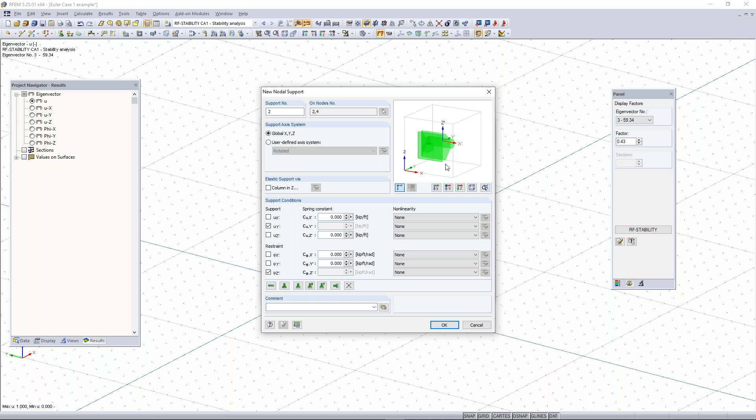So I'm going to add in some supports here at the top of the corners by holding Control and selecting both of my nodes. And this is another way of adding supports. So we can double click on the nodes there and then go to the support tab. And then we can choose available and I can hit create new nodal support. And then under this, I can choose to have those two supports be able to move in the X direction and the Z direction, but I don't want them to move in the Y direction. And then I'll unlock all rotation, click OK

once more. And now you can see that those supports are added, and actually we wanted these not to be able to move in the X direction. So let me change that real quick. So then we want to change this to the X. So now if I click OK, these supports at the corners here are preventing the frame from moving in the X direction, but it can move laterally in the Y and then up and down in the Z. So if I hit calculate, or I hit calculate all, the calculation will run, and then I get my results for our stability.

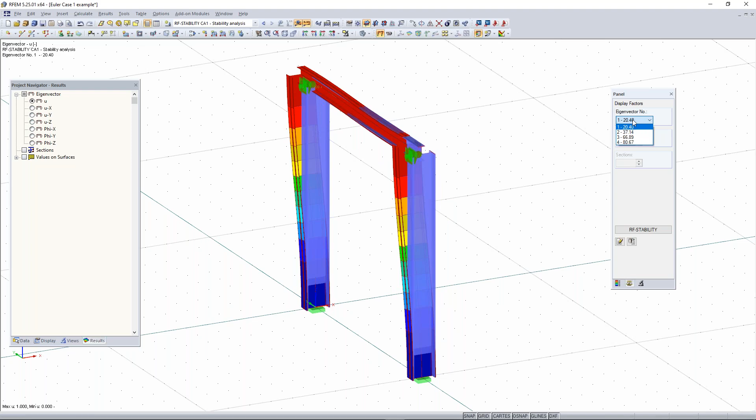So I can look at my eigenmodes here, and now you can see that all of them, especially this third one, is staying within this XY plane, and we are getting good critical load factors. So that's how to create the simple moment frame from that column we had, and also how to run a stability analysis on your models.

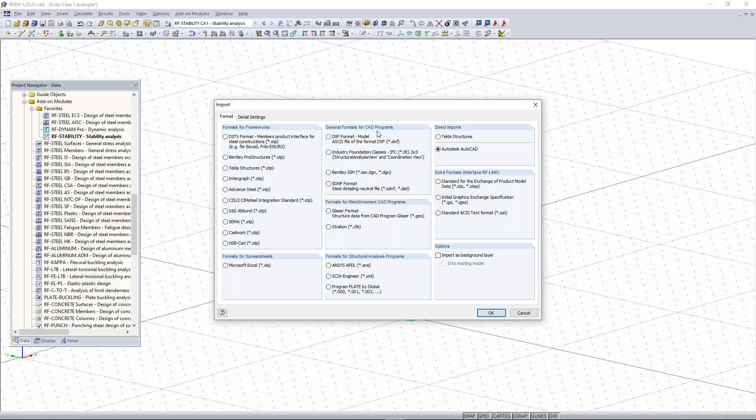So up here in the toolbar, we have these two options: direct import from AutoCAD. You can also export to AutoCAD, and then under File over here, we have import options. So like I said, we have direct imports from AutoCAD, but you can also save your files in AutoCAD as .dxf files and import them as background layers as well if you just want to draw those lines in yourself. So those are a couple of options for that.

Okay. Thanks. And the other question is, can RFEM model cable elements? Yeah, so in RFEM, you can model cable elements. So if I double click on one of these members, this is a good subject to go over member types. So within creating or editing a member, we have different member types. So beam members can take tension and compression forces, and you can edit the member hinges for the start and end of the member. But then you can also see we have cable member types here.

So cable member types, basically, they only can take tension forces. They cannot take compression forces, just like a cable in real life would act. And you can't edit the end conditions of them. Basically, this member type will fail when it takes compression forces, and it'll be able to take tension forces. And also we have the calculation method for cables, which would be large deformation analysis. So it is possible to run that. Maybe Amy has some more insight on this as well, but yeah, I think that's good.

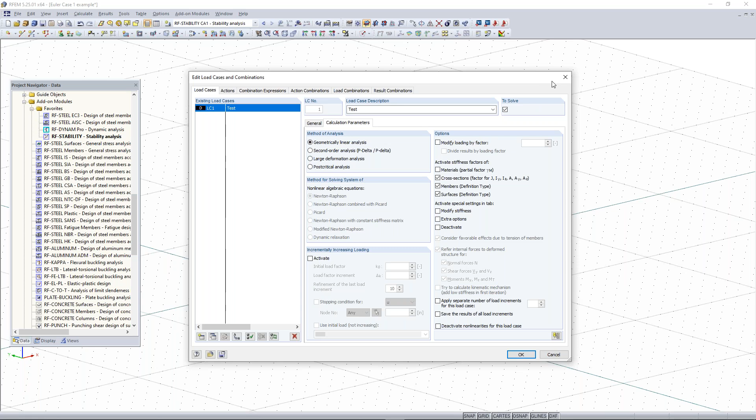So cable elements can be modeled within RFEM, as Alex mentioned. Automatically, the program will default to the large deformation analysis, because cable elements are a little special: the higher the tension force, the increased stiffness of the cable. It's important to know that if you use this cable element, you need to model it with the catenary shape in RFEM. If you prefer not to do that, you can draw it as a straight line and use the RF-FORM-FINDING module to apply a pre-stress force or a sag or a target length, and the program will come up with the catenary shape for you.

Couple other questions here. Does RFEM have detailing modules for steel and concrete? And I can go ahead and take that. RFEM does have modules for steel and concrete design according to various standards, but we do not provide the detailing. So it's something where you could possibly export your results to another detailing software.

The final question that I see here is, if we use two members as one metal column, like a built-up column, can we use RF-STABILITY the same way? I can quickly explain it. I think what the question is asking is if you have two members that are modeled separately but form one continuous column in what will actually be constructed out in the field, RF-STABILITY will behave the same way. It doesn't necessarily change the mode shape if the member is broken into two separate segments. So hopefully that answers the question.

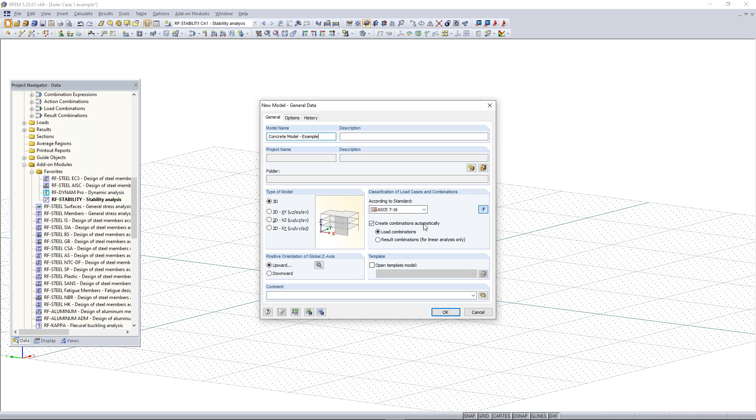Within the new model general data, we can name this model concrete model, and then we'll just name this example. For this model, we'll keep it as 3D, and we'll create our combinations automatically again. So we can click OK. Again, our blank model will pop up here, and we can begin by modeling a concrete surface.

So we can go up here to new rectangular surface. For this one, we're going to use the material 4000 psi according to the ACI, and the thickness of this surface is going to be 8 inches. So we'll click OK. Then I can left click on the origin and drag out my surface. This surface is going to be 46 feet by 40 feet. So we'll go up here and enter 46 by 40.

Then we can go up to our toolbar and click on Show Whole Model. We can also choose the reverse Z direction to get a top-down view. The next thing we need to do for this model is create the columns. An alternative way to do this is to take the node at the bottom left, highlight it, and use our move and/or copy tool. We want to make one copy of this node and move it 2 feet in the X direction and 2 feet in the Y direction. Then we can click OK.

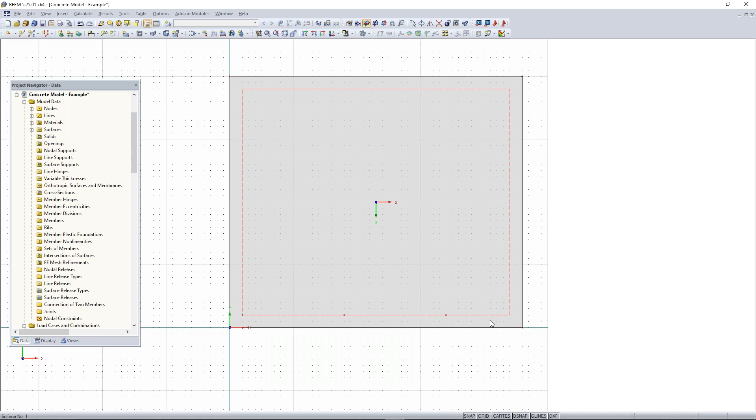Then I want to create two more copies of this node. I'll select the node, go to the move and/or copy tool, create 2 more copies, and displace them 16 feet in the X direction. Since I'm going to have 4 columns in this row, I need one more node. I'll select this node, hold Control, and move it. Whoops, moved the whole thing with it. So let's hold Control, select this node and move it 2 feet in either orthogonal direction.

Next we need to create the other 2 column rows. To select all 4 nodes, I can hold Alt and left click and drag, or change the model to a wireframe view and highlight all 4 nodes. Then we use the move and/or copy tool, make 2 copies of this row, and displace them 16 feet in the Y direction. I'll click OK. Now you can see our row was created 2 more times, with 16 feet between each row.

Now, since this is our floor slab, we want to create the outline for the walls on the outside. We can use our divide line tool and divide this line graphically. The wall on the left-hand side is going to be 12 feet, right in line with this column row. The wall on the top is going to be 28 feet, right in line with this column line row.

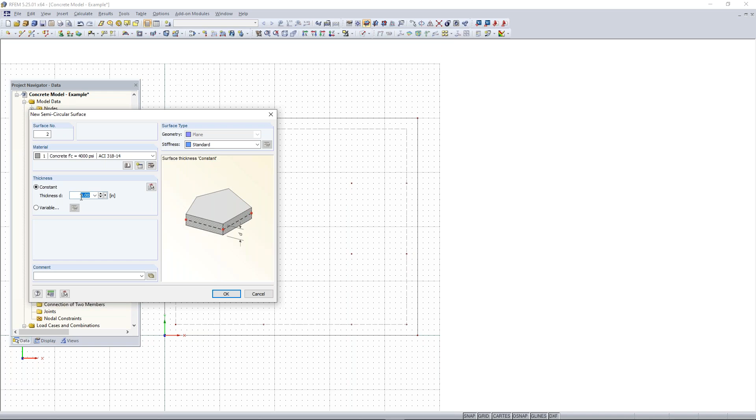Our rectangular surface has other options next to it. If you hit this arrow, we can go to semicircle, and this allows you to draw a semicircle surface. So if we create this, we just need to give it a thickness and a material, and then we can click OK.

Then I just need to select the center of the semicircle. I'm going to move down 7 feet, which is going to be the radius from the top here. So if I select that, then select my center point and the point on the corner there, now you can see we drew our semicircle.

Once we have that done, we can move on to creating our ceiling slab. We'll take the floor slab, and since it's the exact same geometry as the ceiling slab, it's going to be 12 feet within the distance between the two. So all we need to do is create a copy of our floor slab.

So we can use the move/copy tool, and we can simply just make one copy of this. The distance between the floor slab and the ceiling slab is actually 11 feet, but since the center axes of the surfaces are halfway between the actual thickness of the slabs, we need to take this into account.

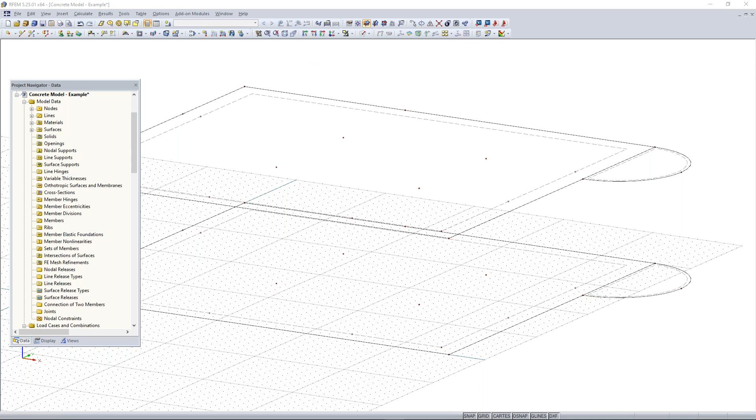Now that we have both our floor and ceiling slab, we can take a look at it in our isometric view, which we can have predetermined, and also get a top-down view. If we look at it from the top down, we can't see both the floor and ceiling slab, so what we can do is turn this into a perspective view. Now we can see both the floor and the ceiling slabs.

This will help with getting a better view on how our model is going to look. So we can now divide our lines here.

What we need to do is put a circular opening in our slab at the top. You can see that this line, line number 10, if I right click and show numbering, we can see the numbering of our lines, nodes, and surfaces. Line 10 here is one long line, so what we want to do is break it up into two different lines at this intersection point at node 40.

To do this, we can use the tool up here, connect members, connect lines or members. I'm going to select that, then drag over node 40 here. Now you can see that the line was divided between line 10 and now we have line 16.

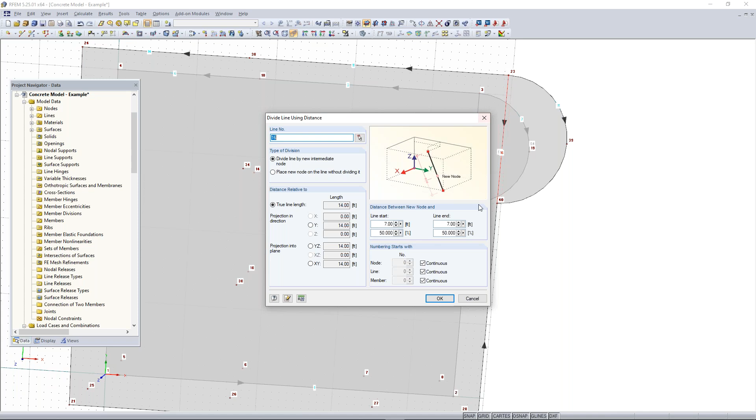Now what we want to do is divide line 16 by a distance of 7 feet. I'm going to right click on line 16, go to divide line, go to distance, and we want to divide this 50%, or 7 feet, from the start or from the end, doesn't matter. We can click OK, and now we have our center point, line 16, 17, and then again line 10.

And now we can simply just delete. We can take this out of perspective view and put it back in isometric, and we can delete our two different surfaces here. So we delete our surface there and then our surface here. We also want to delete our lines 16 and 17 here.

One way to do that would be to go to the project navigator under the lines folder. This is just another way of deleting or editing lines. So I can hold Shift and select both 16 and 17 and then hit delete on my keyboard.

Now we want to redefine our surfaces. This is one way, if you're importing surfaces in from AutoCAD, you may just get the boundary lines only. So if you need to redefine a surface based on boundary lines, you can do that with a tool up here next to the surfaces tool.

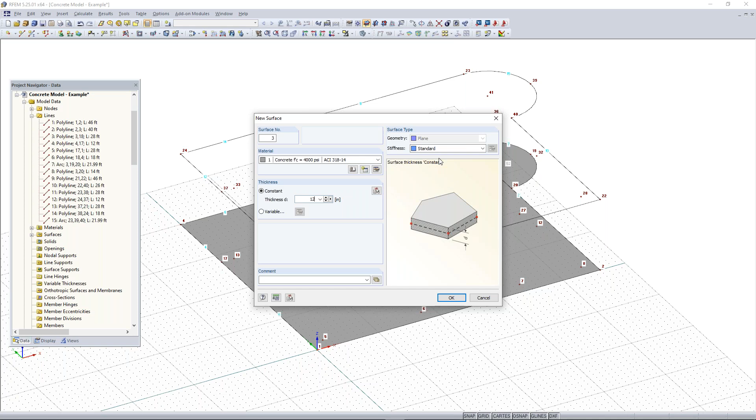If I hit this drop down arrow, I can go to select boundary lines. I want to change this thickness from 8 inches to 12 inches for our ceiling slab. The material we can keep as concrete, and we can keep the stiffness as standard. So we'll click OK, and now all we have to do is choose our boundary lines. Now you can see we have one large surface for our ceiling slab.

Now we want to create an opening in our ceiling slab right here where our staircase will go. For this, pretty simple. To create openings within a surface in RFEM, there is the opening tool here. We can go up to openings, and then we have rectangular, semicircle, but we want to choose the circular opening.

We can simply choose node 41 for our center node here, and this circle is going to have a radius of 6 feet. I can either choose this graphically, and if so I should define a step and change this to something like 1 foot. Now I could easily set the radius to 6 feet, or I can drag my cursor into this box, highlight the parameters, and change this to 6 feet and hit enter. Now if I right click to cancel out of that tool, you can see we have our circular opening here, and that will act as the opening for our staircase.

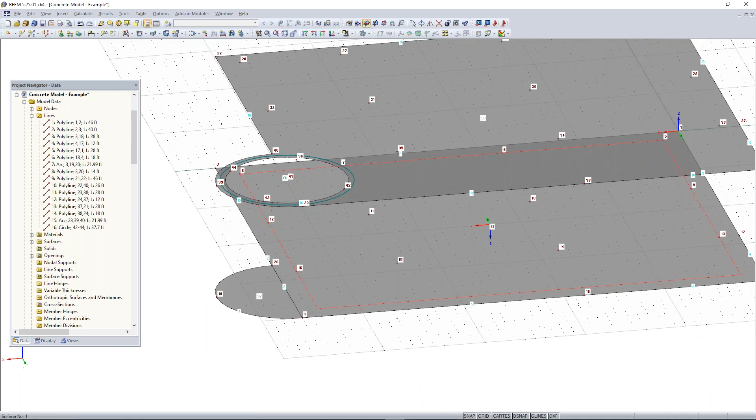So now the next thing we want to do is define our walls on the perimeter of our model here. We can change this into an isometric view and rotate the model to take a look at the side where our staircase is. Next we want to create a wall right here, but first we need to define some lines to act as our boundary lines.

We're going to draw a line that's 7 feet from our node 20 here, so that will be at the coordinates 46, 19, 0. If we go to 46 and 19, we can select this, and then draw our line here all the way up to our ceiling. You can see we have the snap function showing you're drawing perpendicular to the top surface up there. If I left click, now our line has been drawn and it's perpendicular to both our floor and our ceiling slab.

Now I can just draw another line on the other side to define our second wall here. This one, I need to draw from 12 feet from node 3 here, so that's at the coordinates 34, 40, 0. Let's go 34, 40, 0, and then I just want to draw this line all the way up to the ceiling slab, and you can see again it snaps perpendicularly to the top there, pretty easy.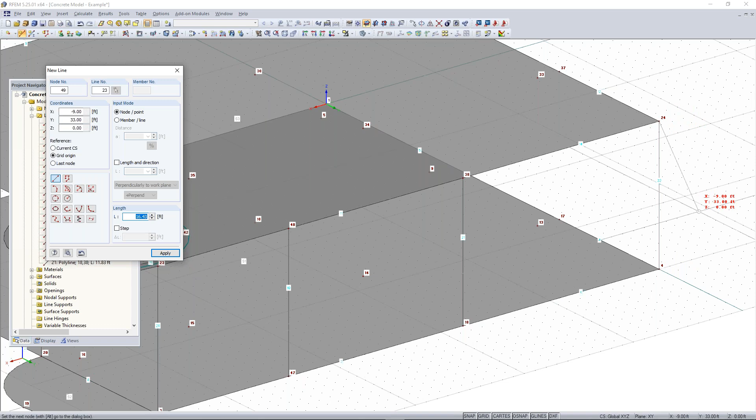Then I can right click, and now all we need to do is connect nodes 20 to node 40, then 3 to 23, and then 18 to 38, 40 to 24, and then 17 to 37. So now we have all of our boundary lines basically for our walls.

So all we need to do now, one last thing, is make sure that these lines where our vertical lines connect are all split up throughout our model. What we can do is use the connect lines or members tool to connect those lines and split all of them up. So I'm just going to highlight the whole model, and now you can see these lines here are split up and connected.

And now what we can do is create our surfaces. Also, there's an option where if you right click and go to this option here, auto connect line/members. I have this turned off, but if you have this turned on, then anytime you connect a line to another line, it will automatically split the line. But as I have it, you can turn it off and do this manually using the connect line/members tool.

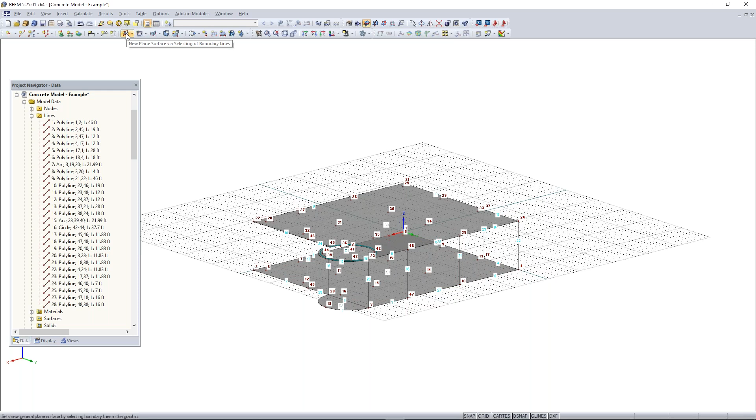So now we want to create our walls here, and again we can use the new surfaces via boundary lines, and these walls are going to have a thickness of 8 inches instead of 12, so we'll change that and get OK. Then I can simply go around and select the boundary lines for our walls here. You have to make sure you select these in a chain operation, so if I choose this line, I can't choose this line up here. I have to make sure I go around so they're all connected.

Now you can see we have our flat walls, and now we just need to create our curved wall here. To create curved surfaces that don't lie in a single plane, and if they have 4 boundary lines, you can use the new quadrangle tool. So if I go up here to the quadrangle tool, general 4-sided surface, I'll click on that, and then you can see again we can choose the thickness and material. I'll click OK, and then we can simply choose the boundary lines of our surface here. Now you can see we have our quadrangle surface.

So now we have basically all the walls to connect our floor slab and ceiling slab. We're missing one more in the center, which will be our load-bearing wall. So what I need to do now is change the origin of our work plane to node 18 here. To do that, you can go up here to this button called set origin of grid/work plane. And then we can select node 18.

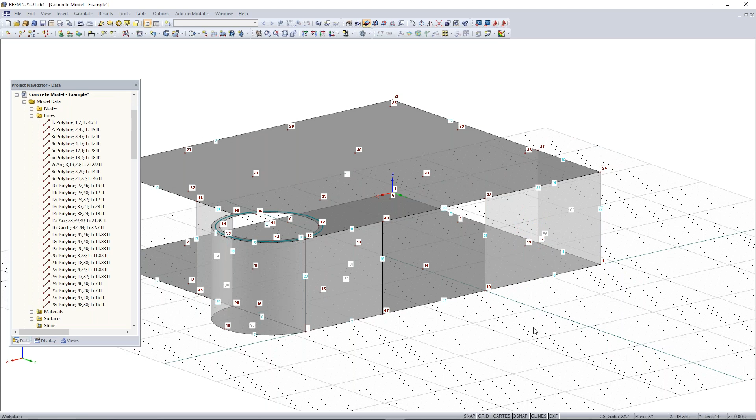And then I can change my work plane here to the XZ or the YZ plane, and I can draw a new rectangular surface. I'll click OK, and then I just need to select node 18 and node 34. Now we have our new wall there. So that'll be our load-bearing wall in the center.

And we can move on with creating our columns now. So the columns, there's different ways to create these. We could just use the new member tool. Also, another way to create members would be to just draw the line first. So if I go to create new line, and then I connect nodes 5 to 25 here, I can take this line and double click on it.

And then I can go up to, we have a couple different tabs up here. You can add supports and FE mesh. We can add a member to this line, so I'll click available. What this will do is bring up the new member dialog box. From here, I can treat this line as a new member and give it a cross section and material. So I'll go to import from cross section library.

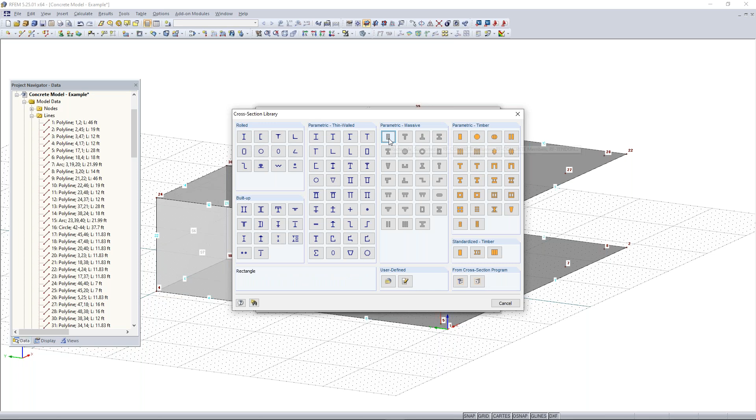And then once that comes up, I'll go to my parametric massive sections, and then I just need to type in the dimensions for the column. So these columns are going to be 12 inches by 12 inches, and the material is going to be concrete 4,000 PSI. So now we can hit OK, and then you'll see the cross section will pop up here. We can hit OK again, one more time, and now you'll see that our line has turned into this 12 by 12 concrete cross section.

So now I just need to take this cross section and add it to the rest of these nodes here. I can do this by holding control and then dragging this over to create a copy of it. So I'll hold control and drag that one over, and then I'll undo that. Let's try that one more time. There we go, select this column, and now we have our row of columns here. So now we just need to make a copy of this row of columns. Another way of selecting elements within RFEM is you can go up here to the select special button.

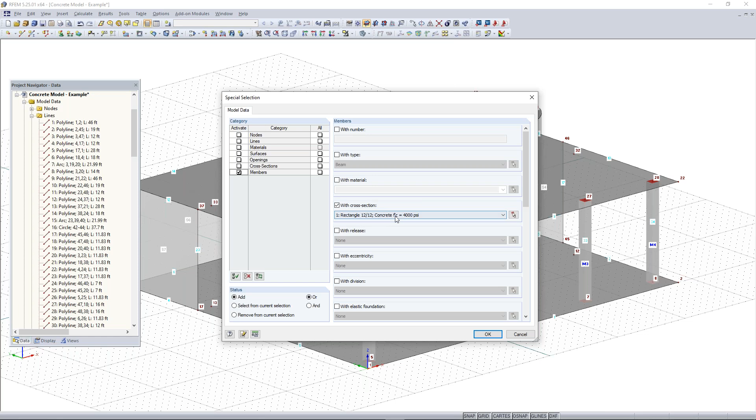And then we can use this to select different categories. So let's say for these columns, I just wanted to select members. So I'll activate members. And then I can choose over here on the right-hand side which type of members I want to select. So I'll choose with cross-section rectangular 12 by 12. And those are exactly my columns. So I'll click OK. And now you can see it selected all of my members with that cross-section.

So what I can do is just hold Control and then left click and drag. And now you can see that I made a copy of my rows there. And that's just an easy way of modeling the same thing. So then I just need to add one more column to connect nodes 15 and 35. So I'll just make one copy of that. And now we have all of our column members.

So now the last thing we need to do is create our load-bearing beam or our downstand beam. That's going to connect our outer wall here to our load-bearing wall and to this column right here. So I'm just going to delete my node there. And to create this beam, we can go up here to new single member. And now I can just create a new member again. So I'll go to import from cross-section library.

And then once that opens up, this downstand beam is going to have some different dimensions compared to our columns. So this beam is going to be 12 inches by 12 inches. And it's also going to be a rib element. So if we go to our member type here, we want to change our member type to a rib type. And basically for rib type members or beams, if we go to edit member type, you can see that for a rib, there are two different integration widths on each side.

So this is going to integrate into our ceiling slab here, and we can have our beam drop down and be on the positive side of our slab according to the local z-axis of the slab. So you can see what that looks like. And also then we can choose the width of each side, and for this example, we'll have it be L/8. So that'll be the width of each side there. And then we can click OK.

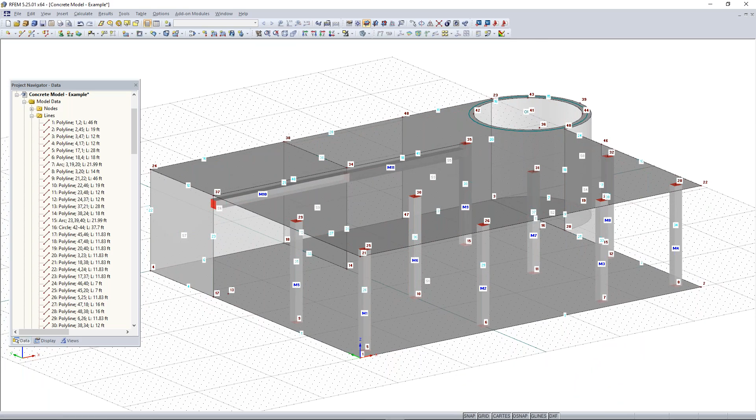We'll click OK, and then you'll see that the program will drop this part down with an eccentricity, and the integration widths are there, but they're just not rendered. So now we have our downstand beam, and the next thing we can do is add in our last opening to the back of our model here. So this will be our opening window into this wall. And this one is going to be 9 feet wide and 5 feet high, and located 3 feet above the surface axes there.

So what we need to do is change the work plane from the XY plane to the XZ plane, and then change our origin to the back corner here. And now we can draw our opening. So I'm going to go up here to rectangular opening. And then again, this is going to be 9 feet wide and 5 feet high. And so we want to start drawing it right here.

And then that'll be the first corner. And then we can put the last corner, and that'll be right here. So 4 feet, 8 feet above. And now we have our opening.

So now that we have almost our whole model created, we just need to add supports to it. So we can add supports to the left side here. So we'll go up to new line support. And we're going to assume that the foundation of this building is adjacent to another one. So we want this line support along this whole entire length here.

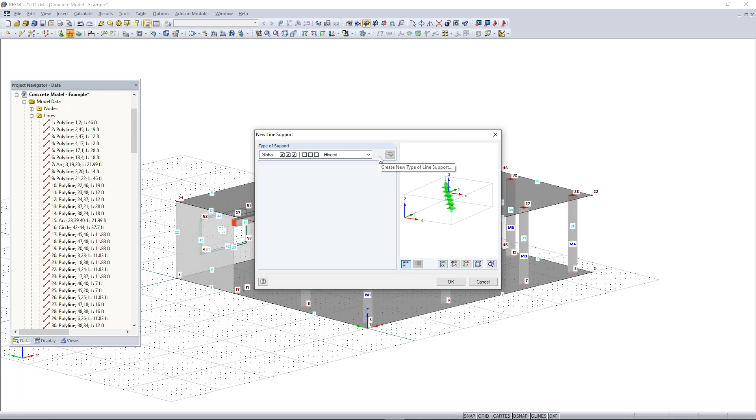And so we also want to make sure that it's defined correctly. And so this side's only going to be supported in the vertical direction. And so we want to take away translation. So again, if you check something, that means it's fully fixed. If you uncheck it, that means it's not fixed at all. And you can also, if something's partially fixed, add spring constants as well.

So for this condition, it's only going to be fixed in the vertical direction. The X and Y directions will be released along with also the rotation. So we'll click OK, and then click OK again. And now you can see we have our line supports there. And then we also want to add in some surface supports. So we want to put those on the whole entire foundation slab here.

So we can go to surfaces, and then we can choose surfaces 1 and 2 and go to edit. So this is another way to choose surfaces within the project navigator and then edit them. So we can go up here to supports, and then we want to check off available. And then for the support condition, we want to make it partially fixed. So for this model, we'll assume the foundation modulus is 640 kip per cubic feet.

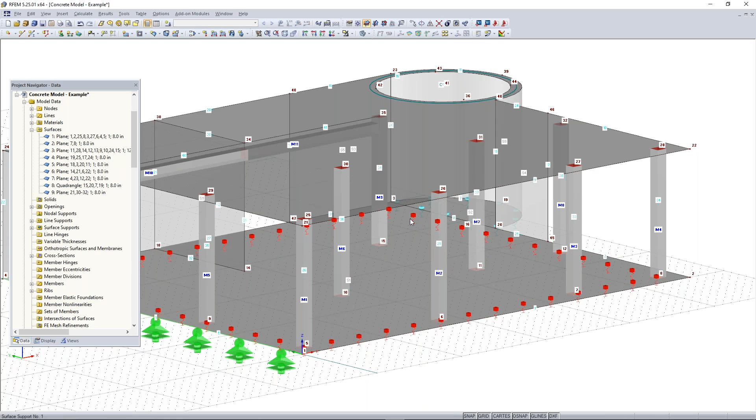So we'll click OK. And now you can see on both our surfaces here, we have our blue supports, and those are our nonlinear supports. If your supports are blue, that means they have some kind of nonlinear definition to them. If they're green, that means they are linear. And all supports are applied at each FE mesh point as well. It's just graphically shown on the perimeter for rendering reasons. So that's how that's run.

And then we need to add in stiffness modifications. So according to the American Concrete Code, the ACI 318-19, we need to modify the stiffness of our concrete columns, walls, beams, and flat slabs. So to do this, we can simply just rotate our model to an elevation view and select and highlight all of our columns and everything here.

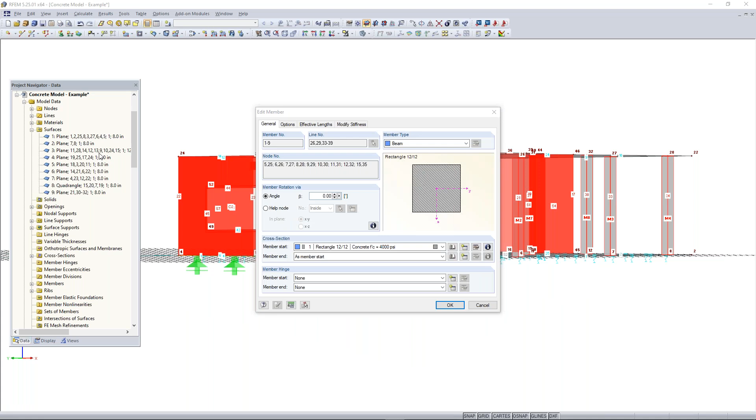And then we can right click on any of these elements, and we want to edit our members. So we have 9 columns here. So we'll edit them. And this is how we can modify the stiffness of our members. So we can go under the edit member dialog box, and we can go to modify stiffness. And then for the definition type, you can either modify your stiffness using your own user-defined multiplication factors, or you can modify it according to standards.

So we have the Canadian code and also the American code for steel and concrete. So we'll choose the ACI, and then we just want to make the component type columns, and the multiplication factors here are automatically taken from the standard for columns. We can click OK, and then we can just do the same thing for our walls.

So we'll go to surfaces and edit, and then we can change the stiffness by going to the modify stiffness tab, and then we can change this to the ACI and set this to walls uncracked.

And then we can do the same thing for our plates and slabs. So we can select both our bottom plates here and then also our ceiling slab, right click on them, edit surface, and then we can change our stiffness here to something like according to the ACI, and we want to set this to flat plates and flat slabs.

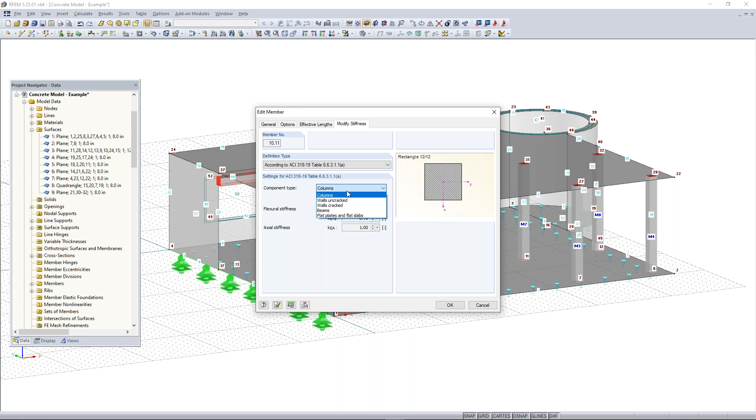And then the last thing we would need to modify is the beam here. So we can hold Control and select both of those, go to Edit Member, and then we can modify the stiffness of the beam here. So it will be according again to the ACI, and then this will be for beams.

So now we have all of our stiffnesses modified, and the next thing we would need to do is run through the loading, but it looks like we're running a little out of time, so we only have a couple minutes left. So what I can do real quick is just create a new load case that just involves self-weight instead of adding any loading, and we can just quickly see what the results would look like for this model. So I'll just create that real quick, and we'll just run the model based off of self-weight.

So this will run and shouldn't take too long since we don't have a lot of loading. So this is basically the results. So right now we're just looking at the deformations, and if we turn this into a wireframe view, we can kind of see those better, and we can see those surface deformations, and then we can go through our results for this, and we could design this model, the concrete slabs and columns and beams, in our concrete add-on modules.

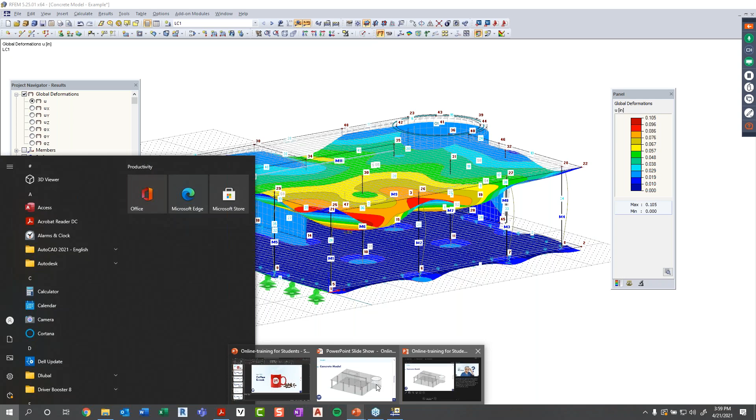So this is what the results for that would look like. And then we can also see the factors for our deformations. So you can see deformations are very low, only at 0.1 inches for maximum deflection. And so we can go back to the PowerPoint, and then that basically takes us to the end.